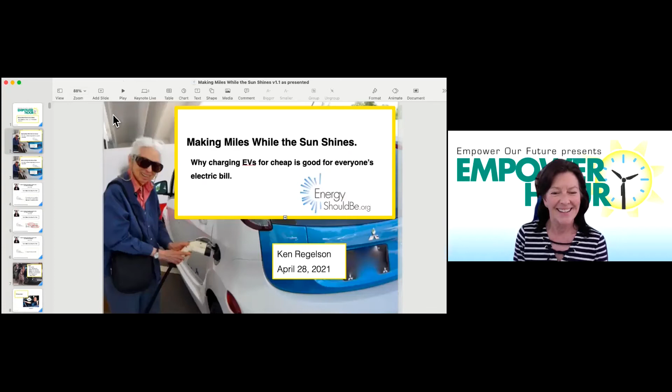So this is my mom. She was 85 when this picture was taken. She's plugging in an electric car. And I'm willing to bet that if she can figure it out, most of you can also.

So we're going to be talking about making miles while the sun shines, and why charging EVs for cheap is good for everybody's electric bill. I tend to think of this as miles and smiles from sun and wind.

Now, my favorite quote, this is just a little bit about me and my nonprofit. My favorite quote is from hockey great Wayne Gretzky: I skate to where the puck is going to be, not where it has been. My favorite bumper sticker is don't believe everything you think. And EnergyShouldBe exists to drive a rapid transition to a reliable, reasonable cost renewable energy future based on data-driven actions. The 2 key phrases here are rapid and data-driven. I want to see as much as possible hourly data about what's going on, and I like my data to be actionable, that the data itself describes what our actions should be.

So this is kind of our outline. Most of these are actually pretty short topics. Driving action - how do we provide information that will make people want to drive action. The energy big picture, electricity's rapid transition, which is already well on its way, rapid transition for electric cars, the best places to use and store the surplus, and we'll talk about surplus. And finally, time of renewables and cheap to charge.

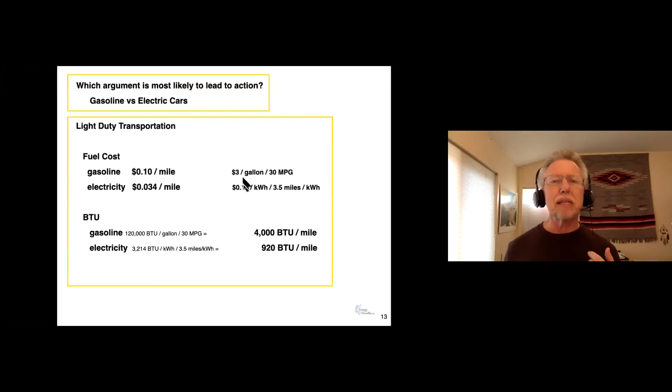Or in BTUs: we know how many BTUs are in a gallon of gasoline, so that's 4,000 BTUs per mile versus 920 electric BTUs per mile. Electricity is just much more efficient. Saying you get a quarter of the BTUs isn't going to get very many people excited, but saying you get a lot less cost per mile, that's pretty interesting.

Maybe we can drive this forward. Plugging in for savings, this is more of a marketing pitch: 15,000 miles per year is $1,000 fuel savings per year. You save a lot on maintenance too. There's no oil to change in an electric car, no spark plugs, no points. There's not very many moving parts within an electric motor.

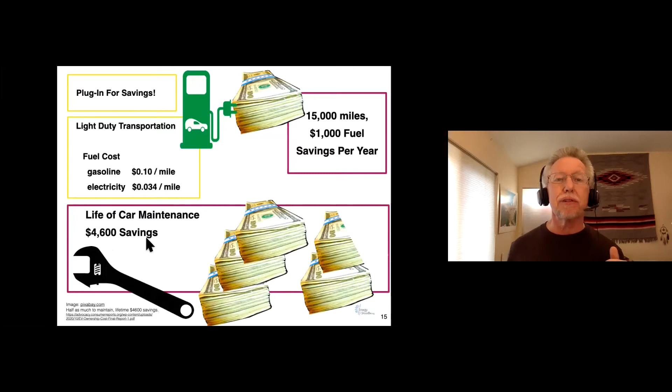Consumer Reports says over the life of a car, maintenance savings are $4,600. That's over the entire life of the car. So let's take this over 10 years, and what you get is $15,000 total savings. This pays for any additional cost of the electric car, pays for chargers, pays for infrastructure, and savings to boot.

So let's talk about the energy big picture. This is my friend Ricky. She loves her plug-in Chevy Volt, can't imagine driving any other car, although she says her next car is going to be all electric, no gasoline. A plug-in has both gasoline and electric.

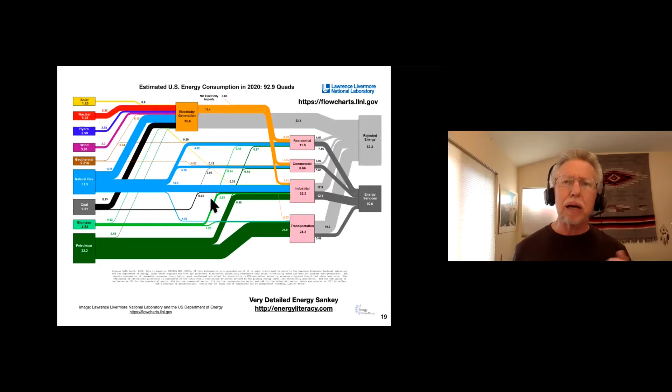Now, I said don't talk about quads of energy, and this is about quads of energy. This is called a Sankey diagram, or a flow chart of energy. What's interesting about this chart is these pipes and rectangles are proportional to each other. I'm not going to talk a lot about it, but you'll see this one a lot. Sometimes people call this a spaghetti chart. If you think of this as lasagna noodle data, and you really want to see angel hair data...

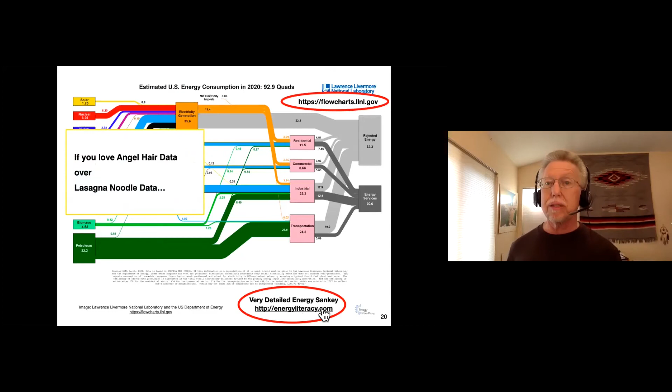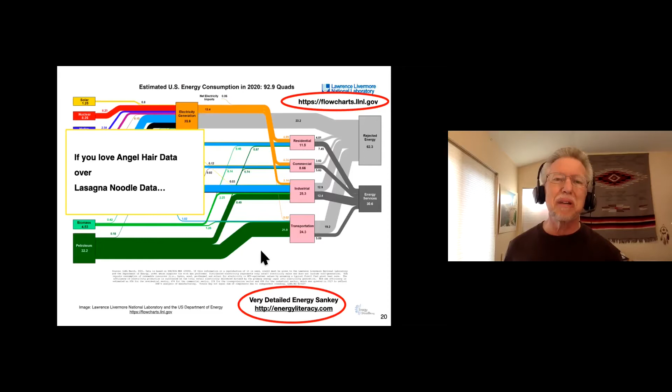Okay, well this isn't very actionable, particularly for most people. It does help us understand some key issues, but it's not very actionable the way it is. I found this chart about 8 months ago, and I've been talking to people about this a lot. I love this chart, it speaks to me as an energy geek. It came from the National Renewable Energy Laboratory, based on the Energy Information Administration of the Department of Energy, using 2015 data. So you have primary energy in quads and CO2 in million metric tons.

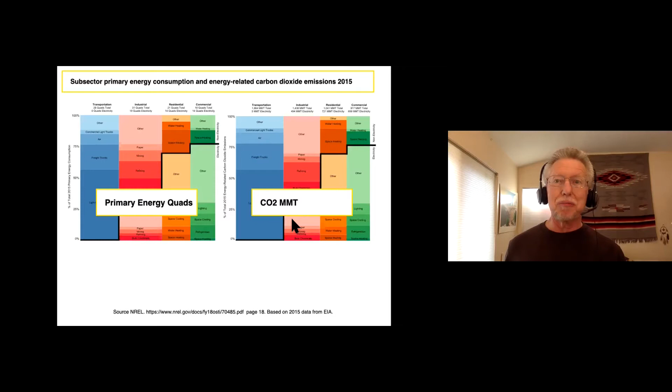I'm not going to talk a lot about this, you're welcome to ask questions about that funny NREL chart. What's interesting about it? The first thing we noticed about two weeks into looking at this was there was no money version of this. We called up NREL literally and said, boy, we love this chart, where's the money? And they said, great idea. Well fortunately I have interns, so I had an intern make me the cost chart.

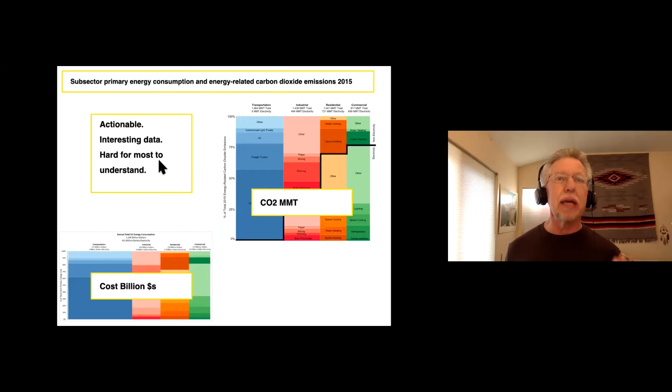So can we simplify it and put together an action plan? Here it is. This is exactly the same data, except I think it's much easier for most people to recognize and see. So here we have the total spend for energy, and most of our greenhouse gases also coming from energy.

The US total for our fuel for our lives includes electricity—this is all of electricity for everything—and this is what's left of fossil fuels for the entire picture of fuel, thinking of electricity as fuel. 1,200 billion dollars per year, and the million metric tons of CO2 that are produced. Now, in order: all transport, just fossil fuels; electricity; industry, just fossil fuels; space and water heating for both commercial and residential; and the rest, everything else that was on those other two charts you saw.

Okay, and what's interesting is they're lined up the same way, and you have the biggest area, the biggest cost, is transportation. We already know that when we electrify transportation, our costs drop to about a third or less. We'll add a little bit of cost for electricity, but when we electrify this, we drop quite a bit. And the top two greenhouse gases, far and away higher than the rest put together, are in transport and electricity.

We'll be coming back to this chart some more, but in terms of actions, is 1, 2, 3, 4, 5. This makes the most sense. The biggest money and the biggest greenhouse gases, next biggest money, next biggest greenhouse gases.

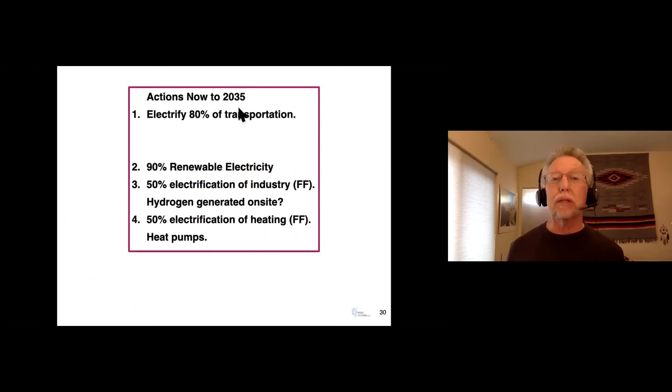Well, electrify 80% of transportation, 90% of renewable electricity. Maybe we get 50% of industry, of what's fossil fuel driven in industry, and a lot of that might be hydrogen generated on site, might not be. 50% electrification of heating from fossil fuels, and that'll be done with heat pumps.

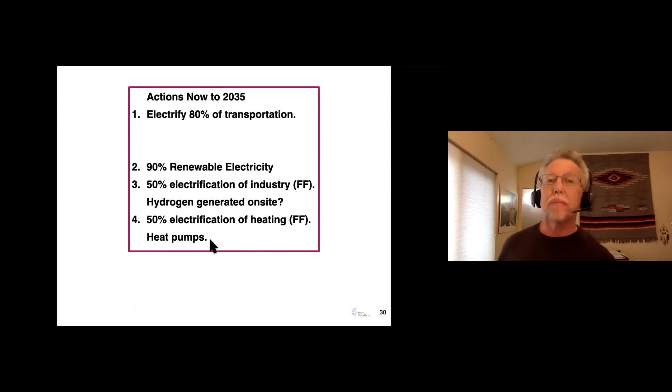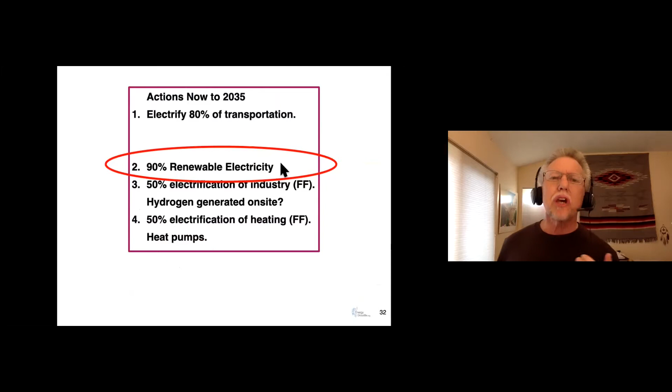This is within range of what scientists are telling us we probably need to get to very quickly. I think this is within our reach. We can do this. Now, I'm going to talk about electricity first because it's in progress right now.

Rapid transition going on right now. Chevy Bolt, all-electric, wonderful little car, one of the cheapest electric vehicles, range about 240, 250 miles, very quick car because it's so small with a big electric motor.

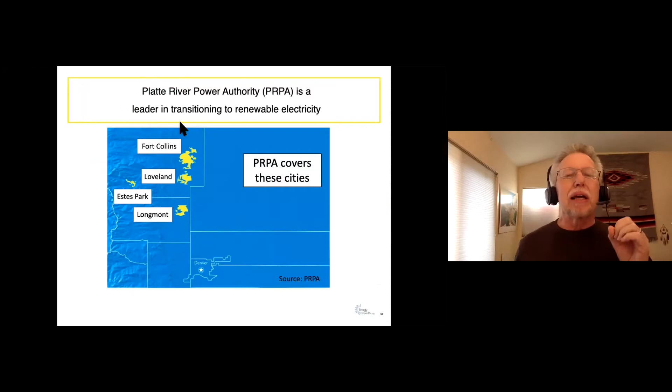So let's talk about an electric generation and transmission company up in northern Colorado: Platte River Power Authority, PRPA. They're a leader in transitioning to renewable electricity. They serve 4 cities—they exist to serve these 4 cities—and they are a nonprofit. They don't have shareholders, they have owners.

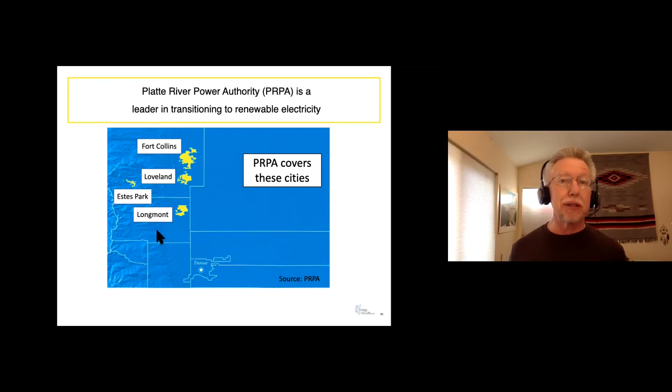Now you have to know about them that they provide some of the lowest cost electricity and highest reliability, not only in Colorado, but in the entire world. And in 2014, they were about 20% renewable electricity, mostly hydro.

Now they have 3 pillars that drive their company, their organization. The first and foremost and highest is reliability. These are the most sober people you're going to run into because they know that when the power goes out in some circumstances, like in Texas a month or two ago, people literally die. And that's not okay by them.

They treat their job with remarkable seriousness. The second biggest topic for them, the second pillar, is cost. And the final pillar is environment—they do care about the environment.

Now, if I had gone to them—if I'd been that smart—in 2014 and said, you will be at 50% renewables by 2020, they would have said, Ken, you are high. You're crazy, you're completely nuts. There's no possible way that we can be there. Renewables are much, much too expensive.

And some of you know this already: in 2020, the middle of 2020, they achieved 50% renewable electricity. And it's simply because the cost of wind and solar went down so much. How much, you might ask? Well, 89% for solar—this is since 2009.

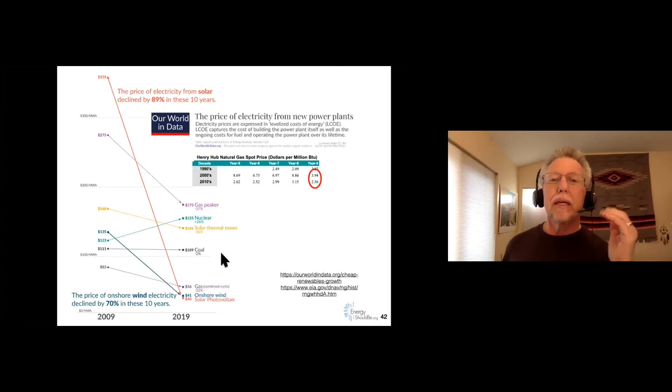Spectacular drop in cost of electricity for renewables. That's what drove PRPA—why they went much faster than any of their plans ever said. So in 2019 they started on an integrated resource plan. It's about 150 pages, a very sober look at every aspect of a utility grid you can think of. It makes interesting reading—it's actually pretty readable, pretty well done.

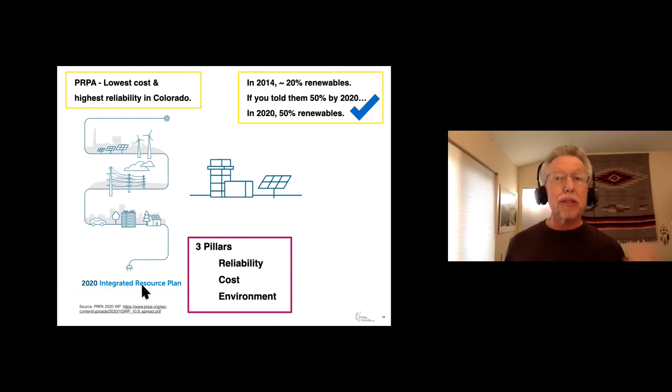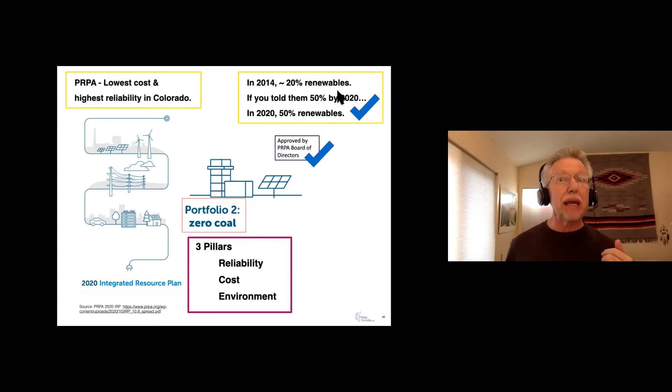In November 2020, the board of directors approved portfolio 2, which is zero coal—they're closing their coal-fired power plant. In 2014, there were 20% renewables and almost 80% coal. This is a remarkable change: 85% renewables, 90% carbon reduction by 2030. It includes big storage, that's included in the costs, and they believe their costs will be business as usual.

Well, that's Platte River Power Authority. What about the rest of the United States? 2035report.com—if you haven't read this report, you need to. Very credible, detailed. They talk a lot about what it takes to keep the grid lit.

Every US state within its borders can have 90% clean, carbon-free electricity nationwide by 2035, dependably—the lights stay on, at no extra cost to consumers, and without new fossil fuel plants, with what they call modest investments in transmission. 2035report.com, go check it out.

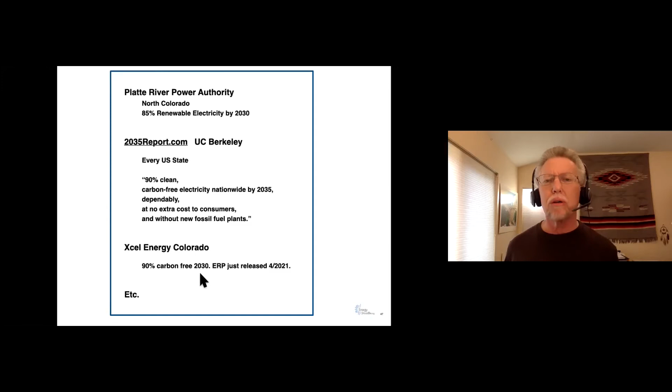Xcel Colorado came out with their 90% carbon-free plan for 2030 about 2 weeks ago, and it's still being analyzed. If you're interested in that, ask a question if you want to know more about Xcel's ERP—Leslie and the company are going over that in detail.

Two weeks ago, 2035report.com released their second report on transportation: saving trillions on transportation, trillions with a T. With the right policy, it is technically and economically feasible for all new car and truck sales to be electric in the United States by 2035, which would prevent 150,000 premature deaths, avoid $1.3 trillion in environmental and health costs, save consumers $2.7 trillion mostly on fuel and maintenance, and support a net increase of over 2 million jobs in 2035.

Go check those out. Well, why? It's because solar and wind electricity are now cheaper than operating, maintaining, and fueling most fossil fuel generators—never mind paying back capital costs. That means if you could build a coal-fired power plant for free, it would still cost more to operate, maintain, and fuel it than the all-in costs, including profit for developers, of solar and wind.

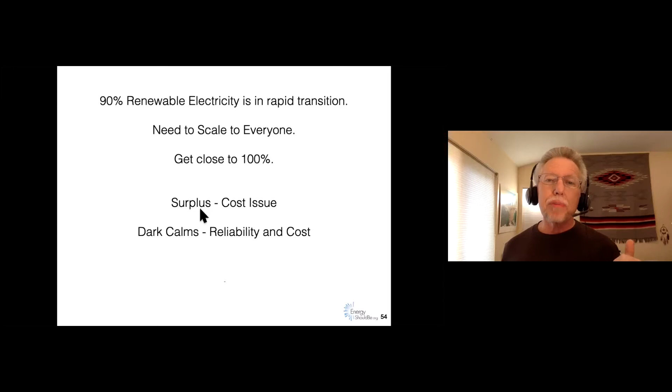We're going to talk about what to do about the surplus.

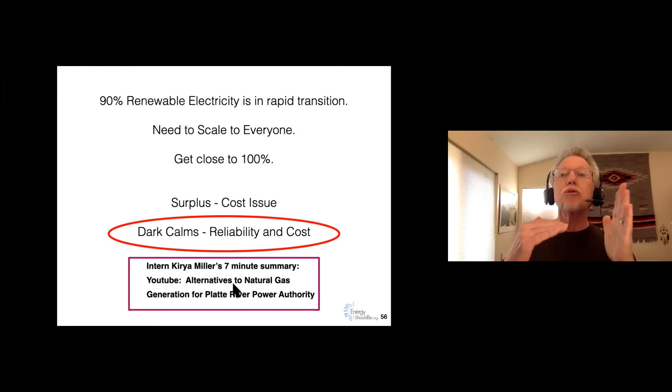Now, for dark calms, I know some of you really want to know as much as possible about this. I have an intern, Kirya Miller, who did a 7-minute summary that came out today on YouTube. If you search Alternatives to Natural Gas Generation Platte River Power Authority, you'll see the summary. There's also a 20-minute version that gets into more detail, where she explains dark calms, shows what the modeling shows us, and how to meet the dark calms. Platte River Power Authority said in their plan, we need to do something about the dark calms. Here's our placeholder. We know there are other alternatives, but here's our placeholder, which is a $140 million new natural gas plant. And these are the alternatives to that.

Great video, worth watching. While I'm talking about interns, I want to talk about heat pumps for a second.

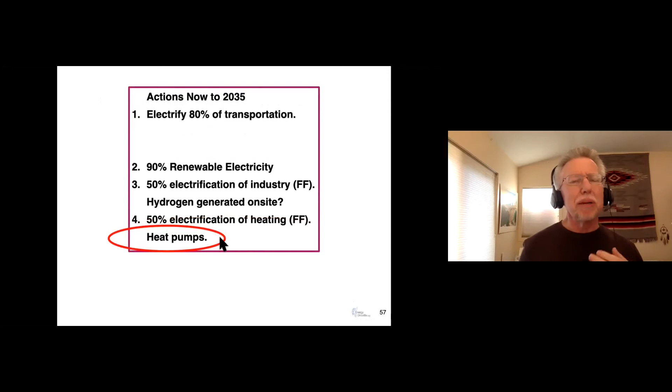How much energy does a heat pump use if a heat pump pumps when it's cold? That's the subtitle. The real title: interns Will Ballin and Kirya Miller, and their work is ongoing. We don't have a release on this yet, but if you're interested in this topic, come and contact me. Air versus ground source heat pump impact on the grid in cold climates. We're getting hourly data on air, ground source heat pumps, and natural gas systems.

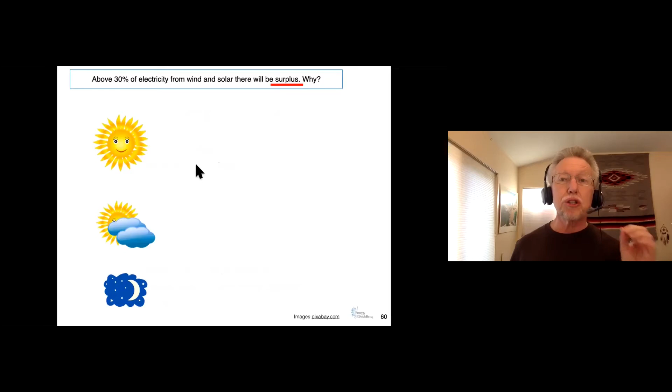Okay, let's talk about surplus. When you get above about 20 or 30% renewable solar and wind in an electric grid, you start having surplus. Here's why: the sun doesn't shine full blast all the time, the wind doesn't blow full blast all the time, and electricity use, sometimes it's big and sometimes it's small.

When these are big and this is small, you're going to have surplus. If you can sell the surplus even for cheap, you can keep the rates low for people. If you don't, then you throw it away, because that's what happens on electric grids - you throw it away, and that costs us money. We'll get back to this idea in a little bit.

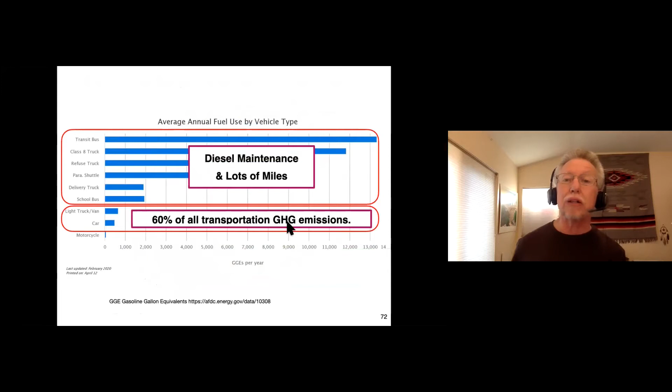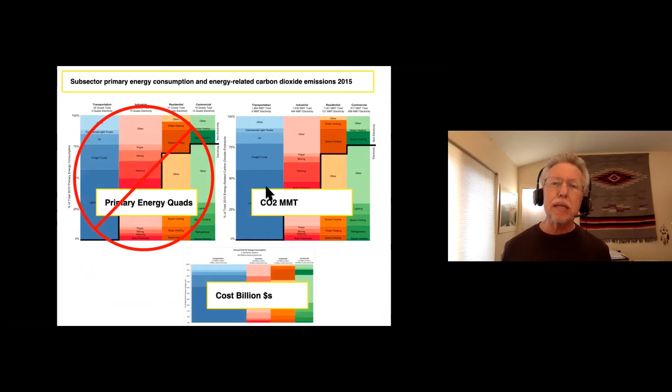light trucks and cars. If you remember this chart, it's a little hard to see, but here are the light duty vehicles. This size is proportional, and it's the biggest block on here. 60% of the biggest column, which is transportation greenhouse gases, is from light duty vehicles. And these are the vehicles that are going to be easiest for us to electrify.

So when we talk about electrifying 80%, I want to show you one more thing about that, and that's air transport here. It may be a little hard to see, but this little block, that's going to be hard to convert. So that's why when we talk about electrifying, we say 80% of transportation. That excludes the air transport and a bunch of the vehicles also.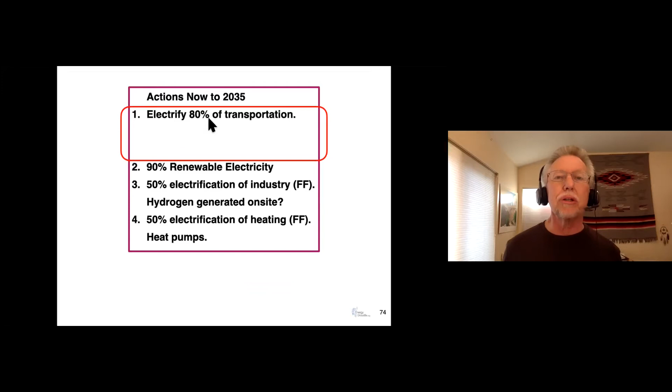So we want to start with the light duty, high mileage, high energy use, high maintenance cost vehicles. And of course we know we can do that. So rapid transition, this shows the curves. They're called S curves because they look like little funny S's for different technologies over time.

From 1960 to about 1980, you've got up to almost 80% penetration for color TVs. The reason I like this is the technology already existed. These were a lot more expensive when they first started. I remember when my family got our color TV in 1961 and how much it cost. And we still did it, because it was better. And that's what electric vehicles are: better.

In fact, we see very rapid growth in market share, from 1% of global electric light duty vehicle sales in 2015 to 4.5% in 2020. And it's expected to grow enormously.

Car and Driver in February said the dribble of electric cars and plug-in launches has turned into an avalanche of news about accelerated EV timelines and emissions reduction goals. The New York Times said an electric trickle is turning into a flood. That was 2 days ago. As many as 100 new electric models are coming to showrooms, and Volkswagen, General Motors, and Ford are floating promises of all-electric lineups within a decade.

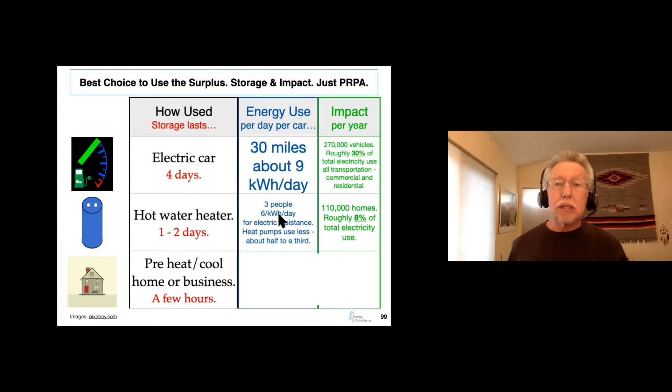If it's 30 miles, we actually know how much energy they use. We know how many vehicles there are. So about 30% of total electricity usage will be consumed by transportation. That's a giant amount. A lot less, still significant, but a lot less for hot water heaters. And here we don't know, but I have interns modeling this.

That's the heat pump story. So let's talk about time of renewables and cheap to charge. Time of renewables, TOR: manage electricity use to maximize sun, wind, and hydro. We've heard about demand management for a while, but utilities, when they talk about this, that's mostly been about reducing demand and shifting it to later.

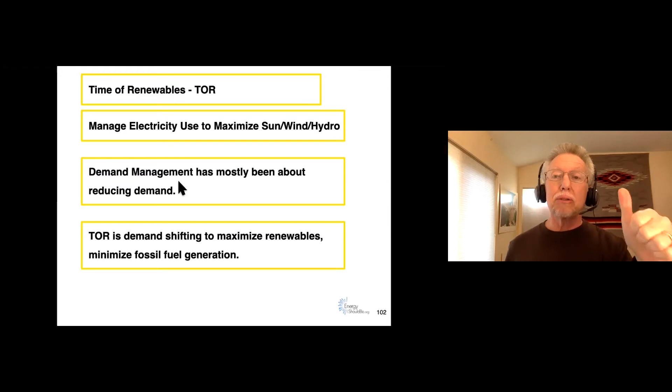We, in fact, might want to get ahead of the game with renewables because we can actually predict pretty well what both the total electricity usage will be hour by hour. Utilities have been doing that for 100 years. And we've also gotten very good at predicting wind and solar in advance, particularly a day ahead and a few hours ahead.

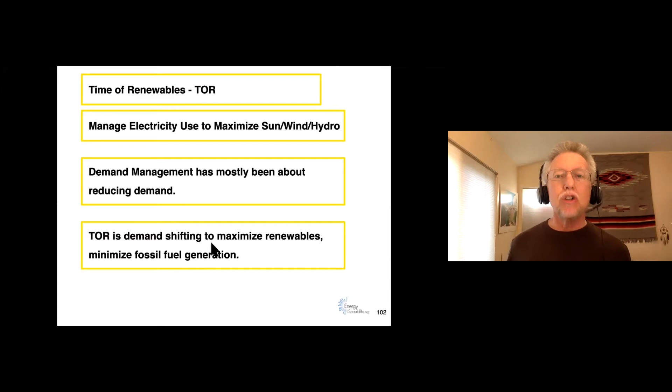Time of renewables is demand shifting to maximize renewables and minimize fossil fuels. Now look, if you're not doing this actively, then you're maximizing fossil fuel use in the United States. So this is from one of our models, based on actual Platte River Power Authority data. This is 1 day. The red line, that's our electricity use hour by hour. Here's the evening peak.

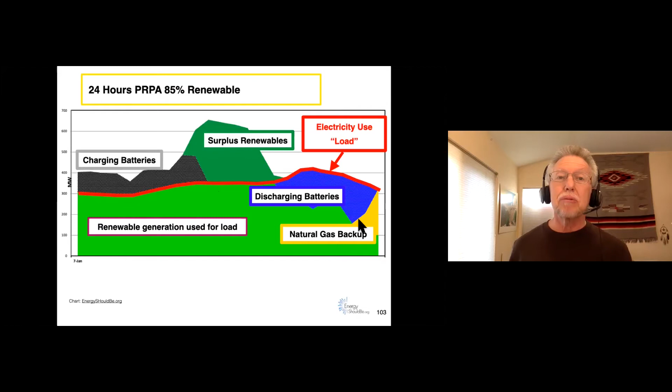The lighter green, that's renewable generation being used to meet the load. Here we're charging batteries on surplus renewables that would otherwise be surplus if we didn't have that big battery that PRPA is planning to install. Here's some surplus renewables. Here's where we're discharging the battery, and here's where we use natural gas backup with this scenario. Remember, this is about 85% renewables, so we have some natural gas backup.

We just found out about 2 weeks ago about an application in the United Kingdom where ZapMap is offering free charging off of the surplus, free electricity when Britain is generating an abundance of solar and wind power. Electric car charging customers get alerted for a 4-hour flash window coming up when they can charge their electric vehicle for free. Free, that's the key word. That really gets people's excitement. If you want to push renewables, you want to push electric vehicle transportation, the amount of free earned media you get just by saying you get free charging on the surplus, and that happens a lot, will make a big difference in pushing electric vehicle transportation.

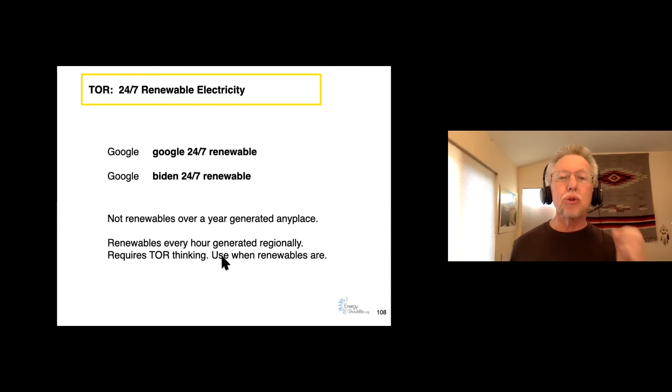Okay, 24/7 renewable electricity. Google the words 24/7 renewable, that's where I first heard about this concept. And now Biden's picked it up, it's actually in his planning now. That means time of renewables. It's not what people usually talk about: we're at 100% renewables now. That's not real, it's over a year, generated anywhere. It's better than nothing, but the electricity generated isn't necessarily electricity that company is using. 24/7 means renewables every hour, generated regionally. You have to use time of renewables thinking: use electricity when the renewables are there.

Okay, you remember this, 240 miles of range? When you do a model, it's just a mathematical expression of what we hope is the real world. No model is perfect, certainly not ours, and nobody else's is either. We assume 240 miles of range, that you always plug in every night, and you always wake up to 120 miles, 50% of a tank. For most of us, that's plenty, that's all we need. Anytime you want, say I want to drive down to Pueblo and back, you can override for a full charge. We assumed 30 miles per day. And when there's surplus, and we make it, maybe it's free to charge or cheap to charge, you fill her up to 240 miles of range.

Now, it takes a while to figure out conceptually how to make a model, and sometimes it takes a long time to implement. In the case of this, it took us almost a year to figure out the idea of how to implement this in our model, and it took us less than a day to actually implement it. And the next chart I'm going to show you is actually almost the first chart that we generated. And when we saw it, we said, this can't possibly be true. Nobody gets 90% of charging on the surplus right out of the gate. It doesn't happen that way.

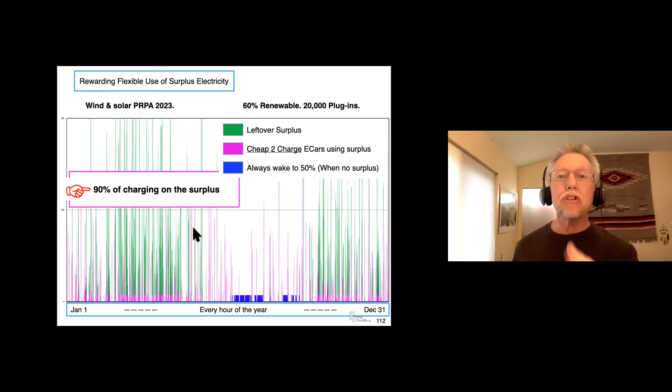But let me explain what this is. Wind and solar for Platte River Power Authority for 2023, 60% renewables, that's where they'll be, they have the contracts in hand for this. 20,000 plugins. What does this chart mean? This is every single hour of the year. Leftover surplus, that's the dark green spikes that you see here. The smaller spikes that are purple, that's the cheap to charge, we're going from half full to full. And the dark blue, that's going to be fossil generation in Colorado. And here's the only dark blue that we have.

This is where you've got to charge because there was no surplus during those periods of time with this mix of renewables. 85% looks a lot different. We said this is wrong, and it took us a while to figure this out. You have to think backwards. Suppose we're full, last night it was cheap to charge, I've got 240 miles of range. How long before the next time I have to charge? 4 days, maybe. 4 days, that's 120 miles to get back down to here, 30 miles a day, 4 days. But actually, the fourth day we don't charge because it's only when we're below 120 miles. It takes 5 days before we actually have to must-charge with fossils. So when we look at that graph we saw before, here's 4 days, there was no must charging. Here's where we have more than 4 days, and we had to have always-wake-to-fossil charging on our electric vehicle.

We ran up to 95% with Platte River Power Authority. That's not where they say they'll be in 2030, that's where we hope they'll be. 200,000 plugins, 95% of non-commercial charging using half the surplus. Commercial vehicles and buses would use about 3/8 more of the surplus, and about 1/8 of the original surplus would still be available for other uses.

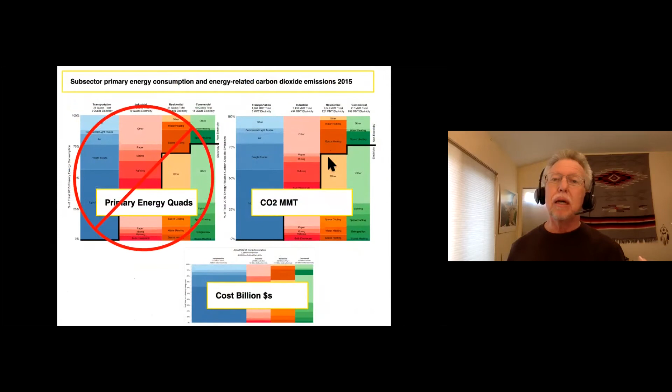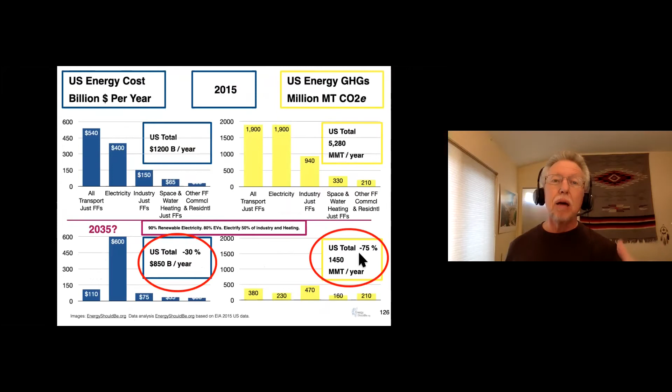Let's summarize. Here are our topics. We know what drives change, what stalls change, and what doesn't help very many people, and that there are big savings on electrifying transportation - in fact, giant savings over 10 years, including maintenance. There are ways to look at data that help us understand what our action plan might be, the massive savings we get in terms of cost, minus 75% in greenhouse gases, by making these transitions very quickly. Electricity can be done very, very quickly, and the reason is because of the cost of renewables.

We have studies that show the entire country - in 2035, in addition to talking about technology, they also talk about what policy is required to drive these changes, both at the federal level and the state level. Mass production works - we've got costs, and we have to cope with them to keep the lights on, and there are ways to do that.

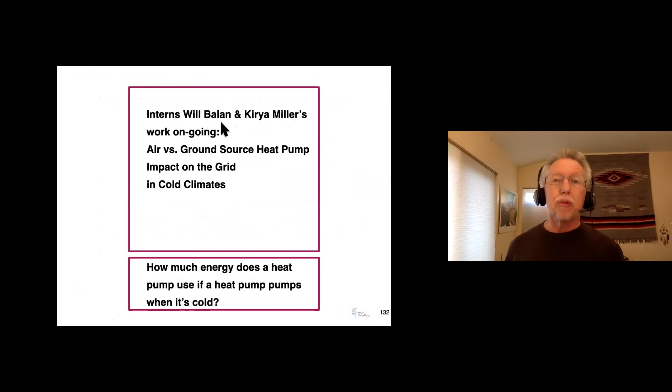We have heat pump transitions that we need to rapidly make, but the number of vehicles converted - oh, there was an article just the other day that said we can't ever get there until 2050 because there are too many vehicles. It's the miles driven, folks, not the number of vehicles.

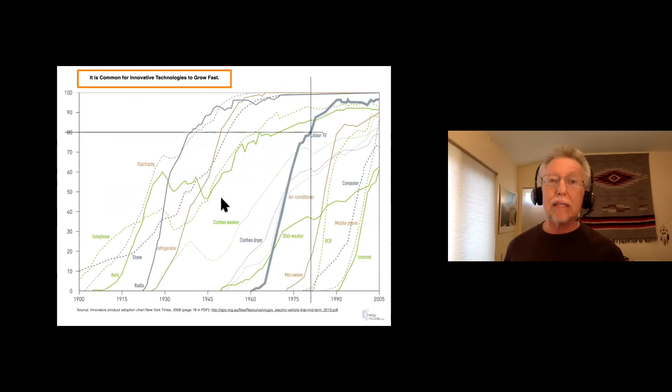The massive savings from diesel vehicles - that adoption of technology can happen very, very fast. It can happen slower too, but there's no reason why we can't be like color TVs - when you have 60% of households with 2 or more cars, one electric, the vast majority of their miles in that household are on electricity because they're fun and quick and clean.

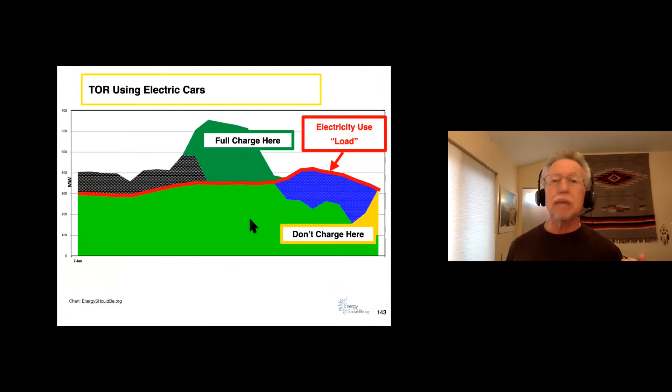Range is improving dramatically. We know where to put the surplus, and what time of renewables looks like - charging our electric vehicles here, not charging here. That's all there is to it. There are people doing this, including for free in Britain, and what the modeling shows us for this, and that car chargers exist. So I'm ready for questions here.

Let's start out with: so how much surplus electricity is there? Well, I'm glad you asked that, as it turns out. It's always a challenge to get everything in - I wanted to put this in the talk, and it was getting to be too long. So I have a set of slides already prepared for answering some of these key questions. We'll see if I have enough slides for most of the questions.

Okay, so curtailed - that's the same thing as dumping the electricity. You can't store electricity except in something like a battery. Remember that the modeling we have includes large amounts of storage, and even so, with that modeling with storage, we still have significant amount of curtailment. But this is Xcel talking about right now.

So the company - this is PUC staff witness Joe McCabe, an electrical engineer - said that curtailment volumes in 2021 are anticipated to be 950,000 megawatt hours of electricity curtailed, mostly from their wind farms. To put that in perspective, he calculated that would be like taking all of the electricity from a large 362 megawatt wind farm and throwing it away. That's what we're talking about.

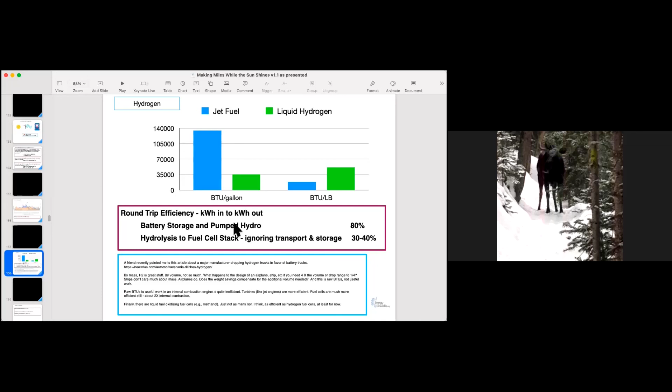Maybe we should take two more questions here and call it a night. I do actually have another, amusingly enough, another Zoom at 7:30.

We do have a question that could either be handled by you or Leslie, and it relates to some important legislation that's going to be discussed tomorrow. This question is, in the wake of Boulder abandoning municipal utility, is there any progress on CCA or CCE in Colorado? I know that there is a bill being heard on that.

I know Larry Milosevic or Leslie would be the right people to answer that question and to say exactly where it is. It needs support like any bill does, and I definitely think it's a great idea to pursue that.

CCA is Community Choice Aggregation. I think this one's being called CCE, Community Choice Energy, which allows a community to choose their own electricity supplier beyond their incumbent electric utility. And needless to say, Xcel probably doesn't like it very much. Maybe just a tiny bit they don't like it.

Yeah, I can jump in and say that the CCE study bill has been introduced, and the House Energy and Transportation Committee is going to take that up tomorrow.

One more question? We don't have any more in the chat. Maybe someone will... oh yeah, you got one hand raised there. Okay, yes, I'm sorry. I have one more question. Hi Steve, I'm sorry, this is Steve Douglas.

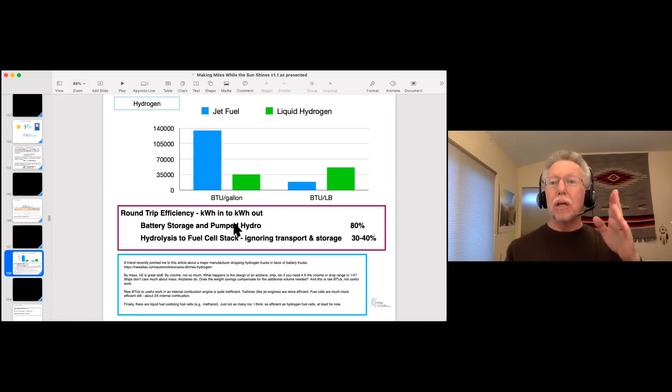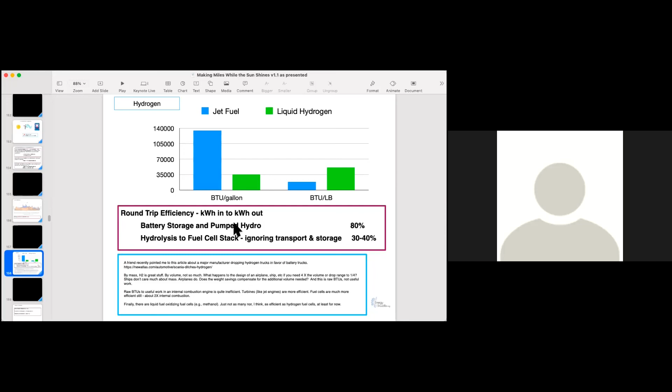Tesla already owns storage where it's merchant, bidding into competitive electricity markets. They're already being approved in certain states, not in Colorado yet that I'm aware of. But it doesn't take too much intelligence to figure this out. In fact, in our state, it's not Tesla doing this, but Holy Cross Energy has a program providing Tesla power walls to homeowners, particularly those far out on long rural co-op distribution lines where you lose electricity from trees dropping on the lines. So to keep electricity up for those people, they're putting in battery storage, aggregated amongst a whole bunch of homeowners, to reduce electricity costs for everybody.

So Tesla, Elon has his moments, but you've got to hand it to him in terms of driving the world towards electrification of cars. Wanting to own everything—Xcel owns us if we're Xcel customers, and I'm not sure I wouldn't mind seeing a choice from Elon myself. But not everything is a perfect decision, not everything is a perfect solution.

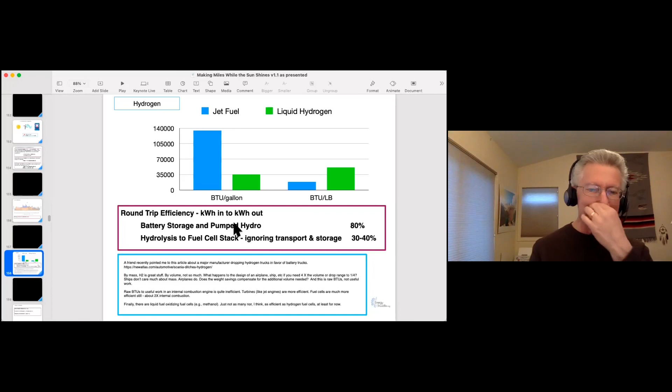I just wanted to give a shout out to Edie Hooton, our representative from Boulder, for working with others in the legislature to bring that CCE bill forward. Yes, thank you very much to all of our electeds. The city of Boulder has some pretty tremendous elected officials—a number of really terrific, hardworking people out there who really care about issues I care about. Edie is my rep, Steve Fenberg is my state senator, and Joe Neguse is my U.S. representative. I've got the trifecta here going.

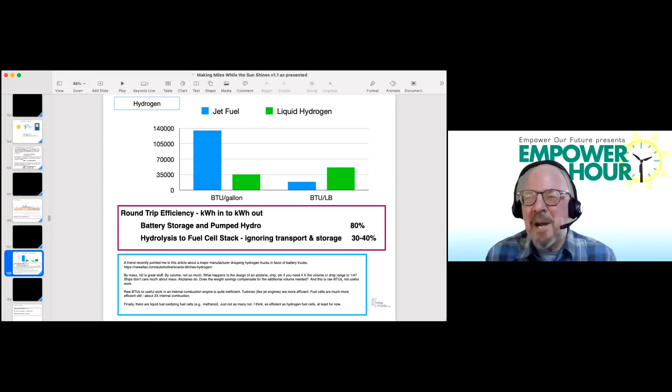I've got to say, as someone who dabbles in learning a lot about energy, I just can't imagine how much time Ken spends every day keeping up to date on all this stuff. It's amazing work. I have interns, and we're not just keeping up with the data—we're doing analysis that other people aren't or haven't gotten to yet.

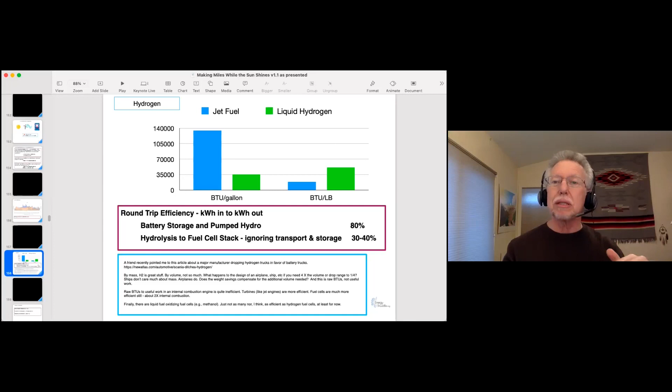Regarding the energy imbalance markets—utilities think that's going to work. We have serious doubt as to whether it's going to work, and even if it does, it's not going to solve their curtailment problems. It works about one-third of the hours of the year, but curtailment is a problem 100% of the hours of the year. So for two-thirds of the hours, we think curtailment's not going to work the way it is. We're trying to gather further detailed information on that right now—one of my interns is assigned to that topic. Another intern is working on a time-of-renewables white paper, also for a class, jointly working on time-of-renewables and putting together legislation for it. She's got an excellent white paper explaining why time-of-renewables is needed, with lots of references, and is also putting together a section for actual model legislation.

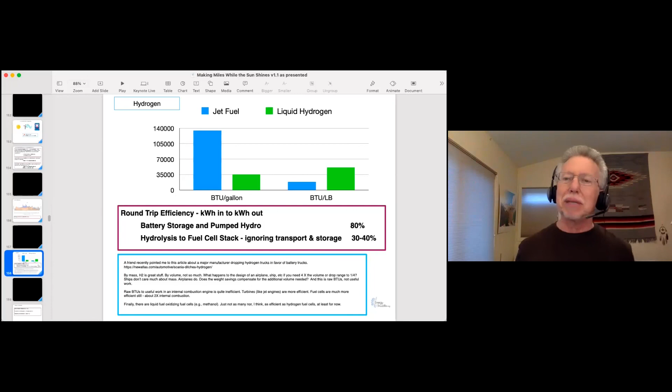So if you're interested in any of these topics, contact me. Yeah, you're great, Ken—thank you so much. Awesome job, Ken. Thank you. Thanks.